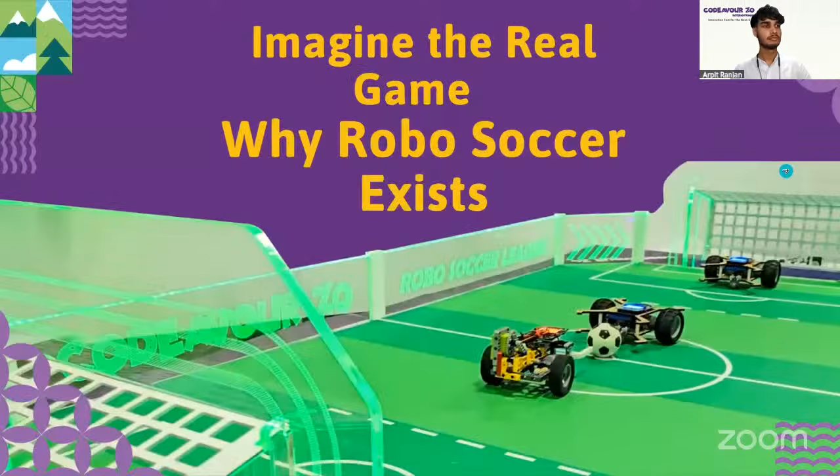Moving ahead, this is the main part of today's session, the Robo Soccer Arena. So let us understand why Robo Soccer.

First of all, it is a simple idea: learning should be more futuristic. Our goal is to turn every young learner into a creative problem solver ready for the future.

This Robo Soccer brings STEM learning to life through real play and making coding robotic projects in a fun and creative way, encouraging kids to build, test, fail and improve just like real engineers, inspiring teamwork, sportsmanship, and innovation.

Moving ahead, these are the total flow of the Robo Soccer arena. Just like a normal football match, you can strategize your own football arena match. You can strategize your own robot, design multiple mechanical and different parts for your own robot, and code according to your need, and then the main action plays.

So here's another video. We'll show a glimpse of how Robo Soccer robots will be playing football.

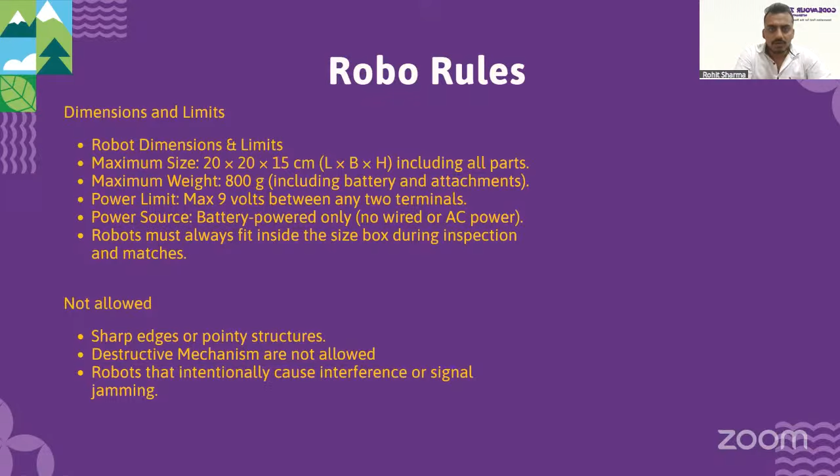Today let's go a step ahead and learn how we can design the robots, right? What majorly comes with designing robots? Designing a robot is very simple for soccer. The major components are motor, batteries, controller, chassis body, wheel, and mechanisms. All these combine to make your robot ready.

You can text in the chat box what tool parts you add. Will it be sensors, lights, sounds, or what kind of advanced mechanisms? You have to know that every great robot starts with a great plan, so you have to sketch it, think, then build it, thinking of all components.

Let's move to the next.

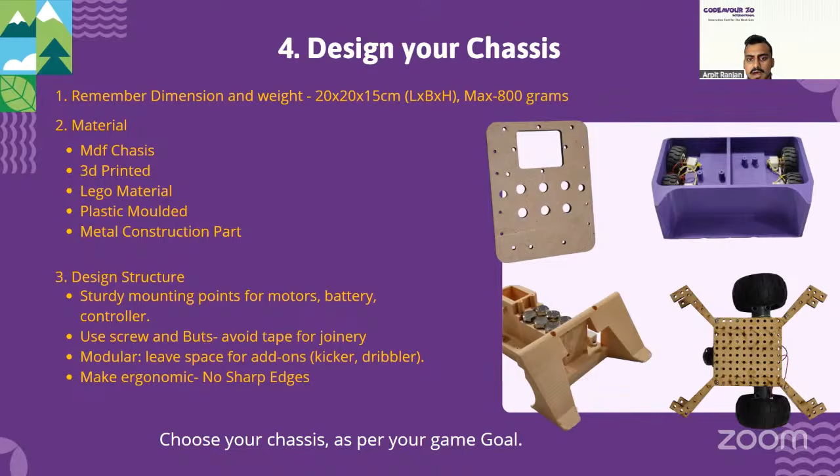While selecting the chassis, you have to make sure what kind of materials you are selecting and what kind of sturdiness you want to build into your robot, based on what you have thought about. So designing your chassis is majorly based on your materials and how you design. The materials could be MDF, 3D printed, Lego material, plastic molded, or even metal parts. But make sure you follow the design rules completely.

Okay, now do you know about chassis? Let's move to the next slide.

The next part is how you choose your power and brain, which is most important because that drives everything in your robot. The major power comes through battery, and your driver board could be anything, but the major rule is it should be coded through PictoBlox. That is one of the most important rules to keep in mind. You can use different boards like Quarky, Arduino, ESP32, or Microbit, but make sure the coding is done only through PictoBlox. For batteries, you can use different kinds, but make sure nothing exceeds 9 volts, as mentioned in the rule book I mentioned earlier. That is the most important part of designing your robot.

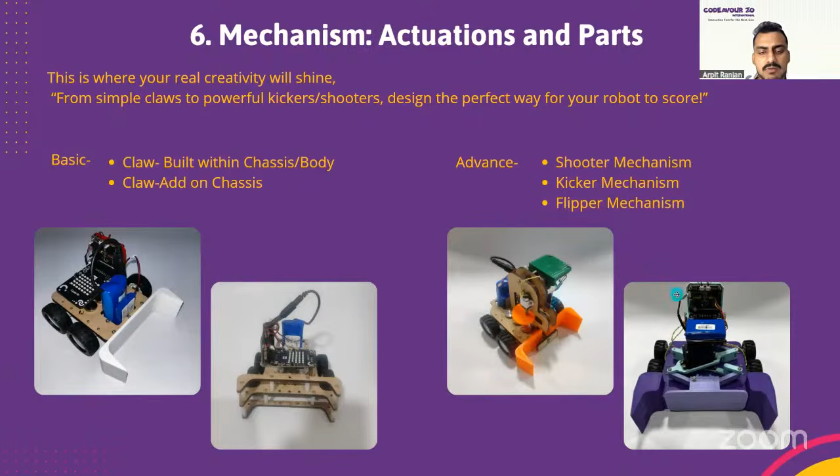Okay, let's start with mechanisms again. As you can see, there are different types of mechanisms you can build. One is the claw, which is basic and which you can build into your soccer robot, and then you can build advanced mechanisms like shooter mechanisms, kicker mechanisms, and flipper mechanisms. The claw mechanisms can be built as an add-on material, or you can make it in your chassis itself, which you can see in the images. The other advanced ones are flipper and kicker, which I will tell you about in detail going ahead.

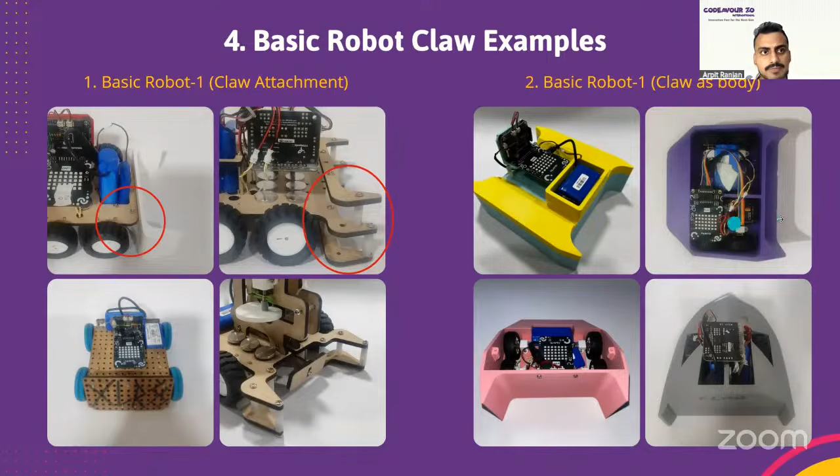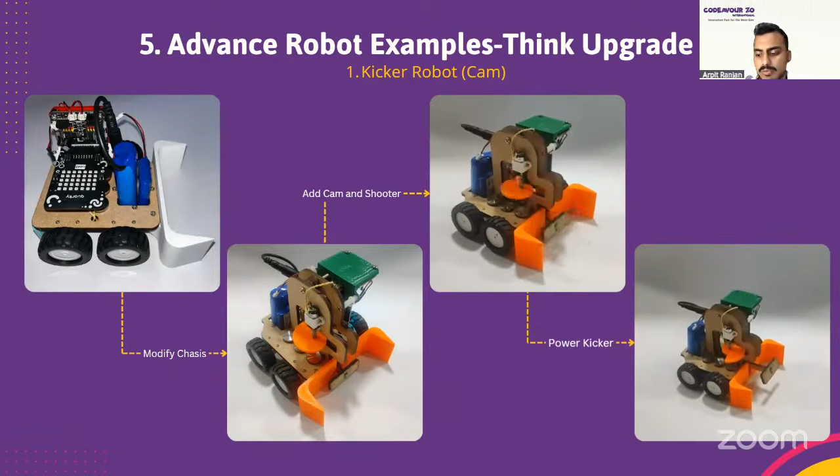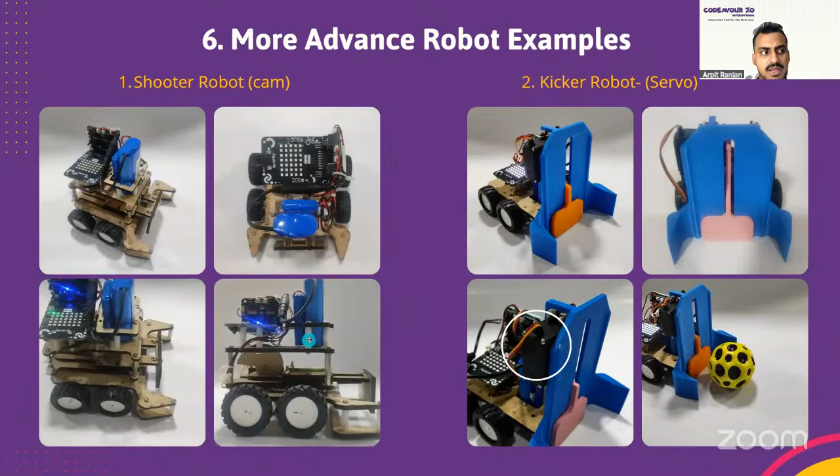Let me take you to a more advanced mechanism you can build - another one is again a cam, but a different mechanism. This one is more powerful and gives you more torque and a better length for shooting. You have to think like I told you - think like a goal coach. Think about which robots you have to build for your game arena, what kind of robots you have to bring. You are allowed to bring two robots for the game match and one as a backup, so design your robots accordingly so you can use them for different timings. That is how you have to build your strategy.

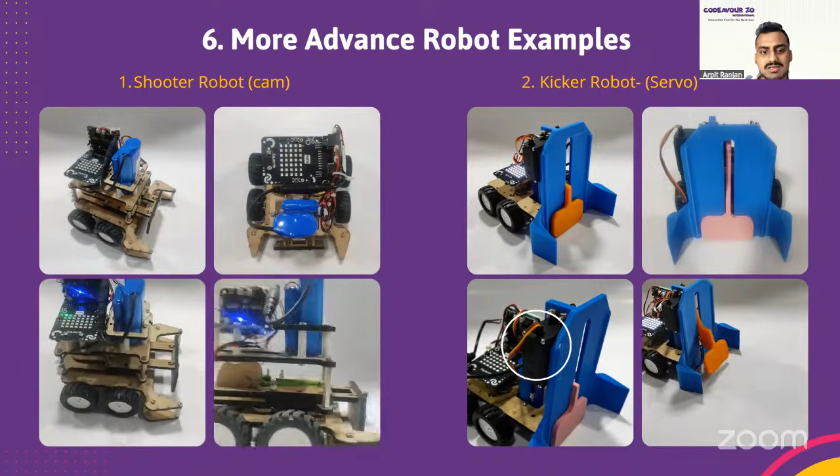Another example is the kicker robot, which uses a servo that gives more power than any other robot. This is again a design principle and design mechanism. You are free to design your own robots, your own designs and makings. You can choose - these are just examples to inspire you.

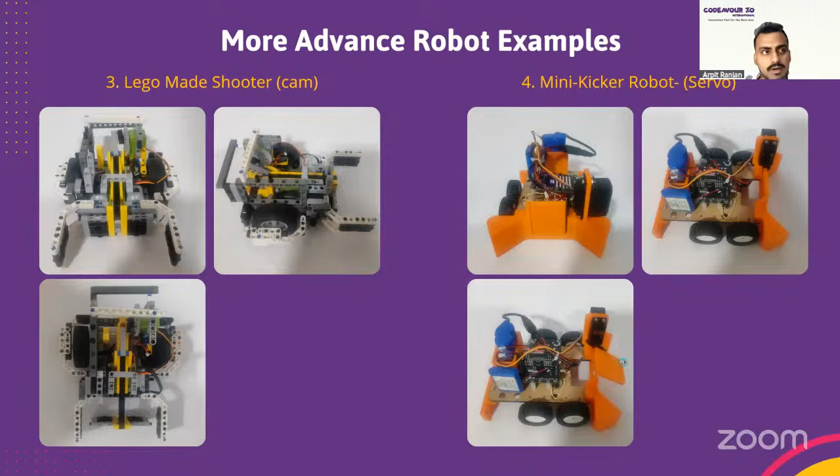We have also made a Lego robot, and shown the mechanism of a cam. Then you can see a mini kicker robot, which has a servo again to help kick the ball ahead. Then there is a special mechanism called the scissor mechanism - you can see in the image how it can be built to shoot a robot. This is a more advanced mechanism which you can build.

Then we have the 4-bar mechanism. If you see the highlighted red area, it's a 4-bar mechanism. It gives high torque and high torsion to kick your ball ahead. This is how you have to think of different mechanisms - lever mechanisms, scissor mechanism, 4-bar drive.

Also, here is a 6-wheel drive. Once you are designing a robot, it doesn't have to be only 2-wheel drive or 3-wheel drive. As I told you, you can make 4-wheel drive, 6-wheel drive, and you can also use omni wheels. This is how advanced you have to think, but within the rules and regulations.

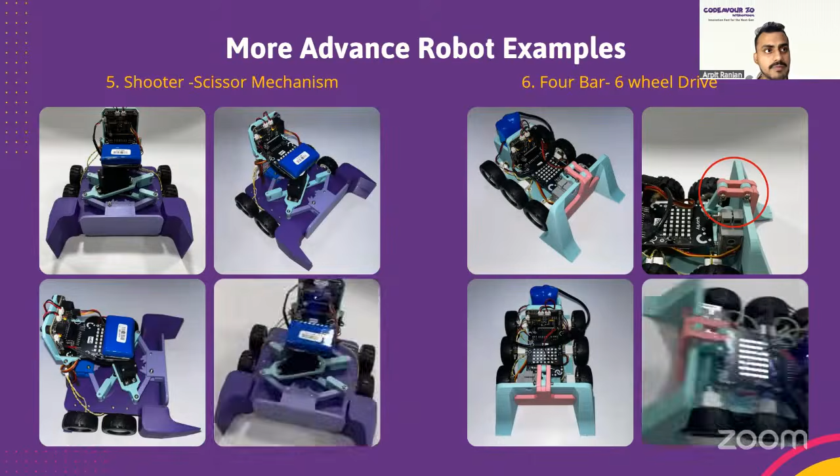Another example is gear powered. Till now you have seen motor powered and servo powered, but here we have added a gear to make it more advanced with torque, giving you more power to shoot while running your robot. As you move forward, you can shoot it very smoothly.

Another example is the wedge robot. This is not a mechanism robot, but an advanced design to give you a defensive robot. If some robot is coming for attacking, this can be a great example for defense.

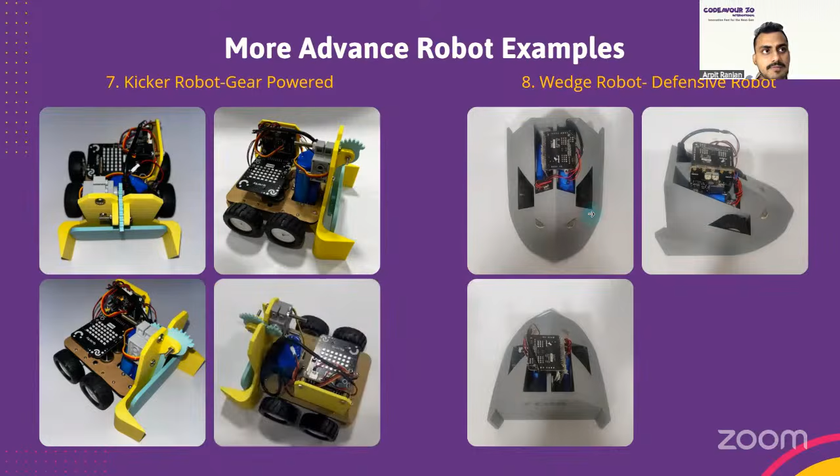So all these were just examples of how different mechanisms you can build. Now let's jump into how cleanly designed robots you should make and why. Most of your circuitry, wires, microcontrollers, wheels, and motors could be exposed and could be damaged while playing. So your goal should be to make clean designs.

This is one example which we have built. We have incorporated everything inside and encapsulated and hidden everything with the lid. You can see it's a completely designed robot and nothing is exposed outside. This way you can win your games more precisely because nothing will go wrong with your robot. But one major rule you have to make sure of is to leave a space of 4 by 4 centimeters on your robot - this is mentioned in the rules.

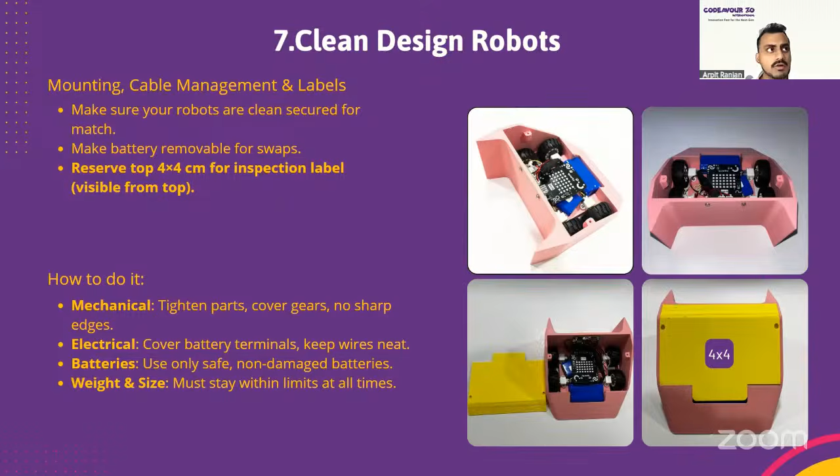I hope everything is clear till now. So this is done. Now let's jump to testing and practice. Once your robot has been made, you have to do a lot of testing and practice. Test with your school teachers, test with your mentors, test with your parents, test with your friends, because your robot has to be perfectly as per rules and regulations, and it will go into inspections. In the inspection, if your robot is not perfect, it will be disqualified. So make sure you test everything, practice your match, and make great robots. I will hand over to Arpit again, and he will take you ahead with the whole journey of robot making.

So hello once again, guys. Let us go through Robo-Soccer League quick rules. What are the quick rules? A basic introduction about the total match format and what the match flow is.